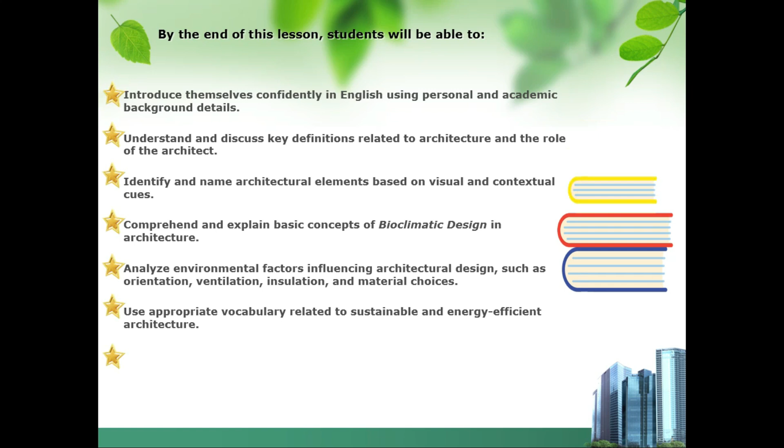By the end of the lesson, you will be able to introduce yourself confidently in English, understand the definitions of architecture and architect, identify architectural elements in images, learn the basics of bioclimatic design, and use essential English vocabulary related to sustainable architecture.

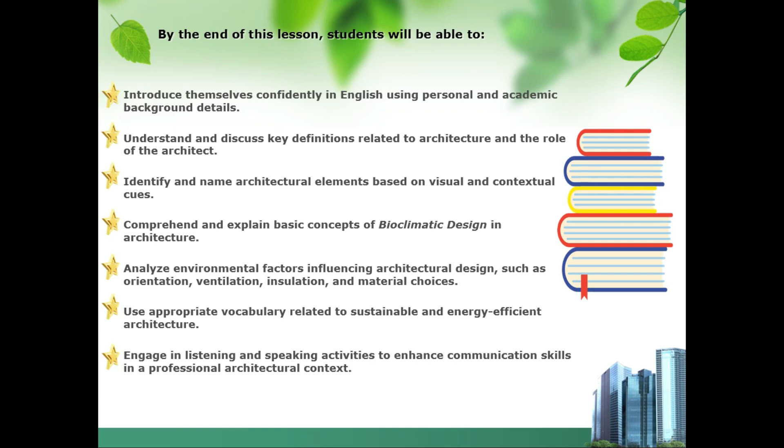Let's begin with a warm-up activity. Here's a short model you can use to introduce yourself. Now take 1 minute and prepare your own version. You can write it down and practice speaking.

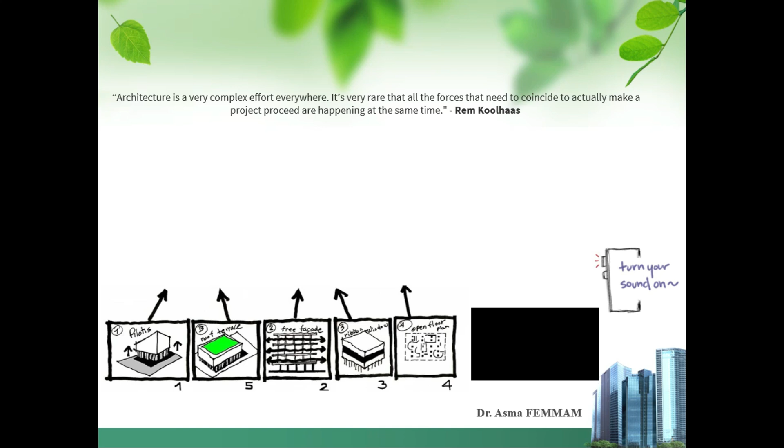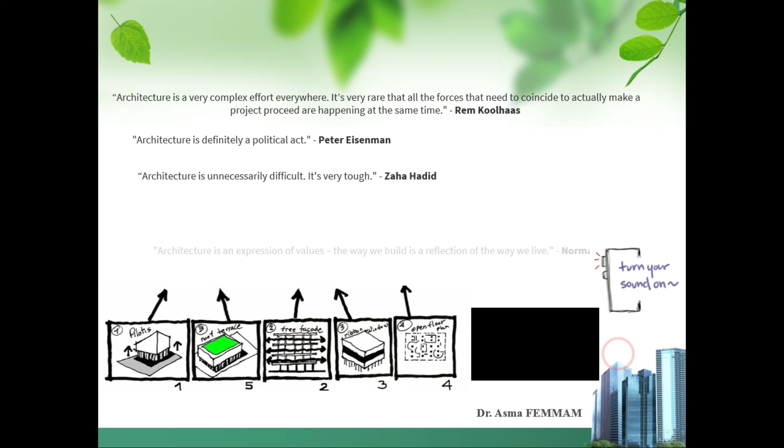Now let's think about what architecture really is. Here are some famous quotes from world-renowned architects. Rem Koolhaas: architecture is a very complex effort. Zaha Hadid: architecture is unnecessarily difficult. Norman Foster: architecture is an expression of values. Jean Nouvel: architecture is a mystery that must be preserved.

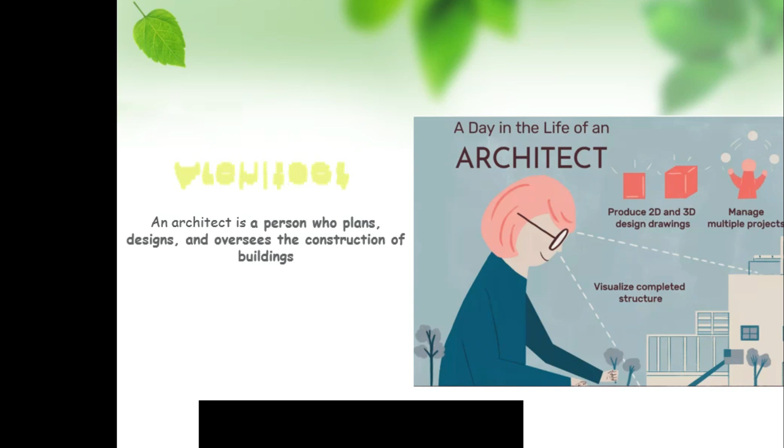These words show us that architecture is more than buildings. It reflects how we live and think. What is an architect? Let's define what an architect does. An architect is someone who plans, designs, and manages the construction of buildings. It's a profession that combines creativity, technical skills, and responsibility.

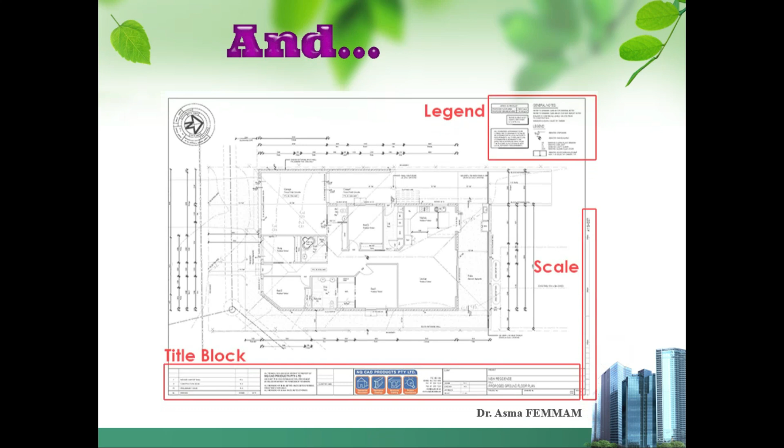Now I'll show you a short video. Please watch and listen carefully. Try to understand the main ideas and note down any new words. When the video is finished, you can pause the lesson and write a quick summary about your own house.

Let's now move on to the main theme of this lesson, bioclimatic architecture. This type of design focuses on reducing energy used by working with natural climate. What is bioclimatic design? Bioclimatic architecture uses natural resources like sun, wind, and light to heat, cool, and light the building. Before we go into the 6 principles, let's understand the philosophy behind bioclimatic architecture.

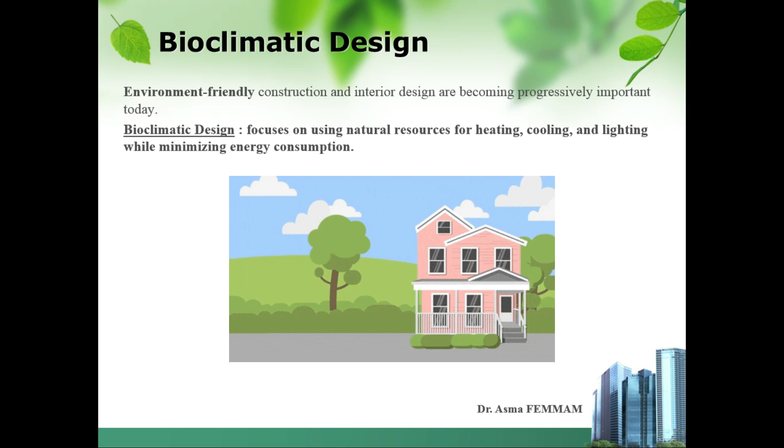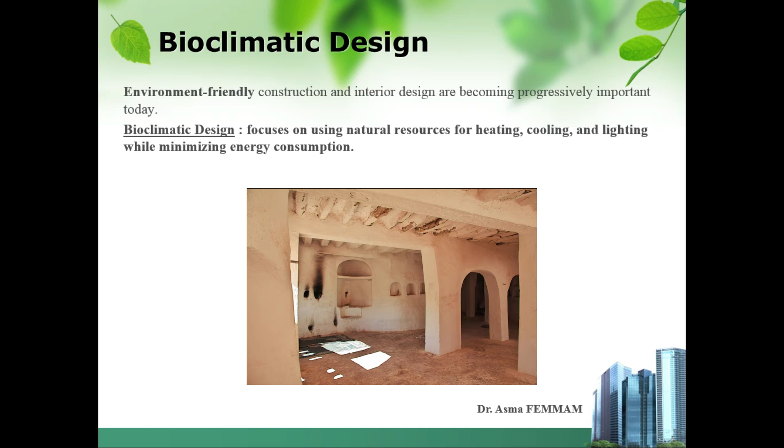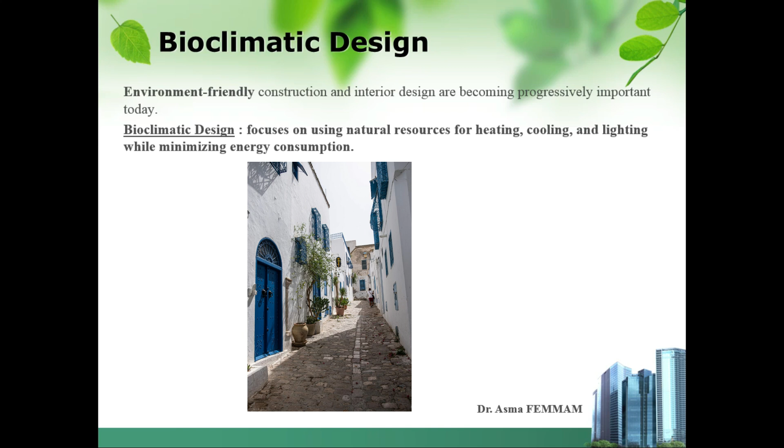Bioclimatic design is a method of designing buildings that take into account the local climate. This idea is not new. Traditional architecture in many cultures uses bioclimatic ideas naturally. For example, in the Algerian Sahara, thick adobe walls and small windows help keep homes cool. In Japan, wooden houses were built to allow natural airflow through sliding doors and open corridors. In Mediterranean regions, homes are often white to reflect sunlight and stay cool in summer.

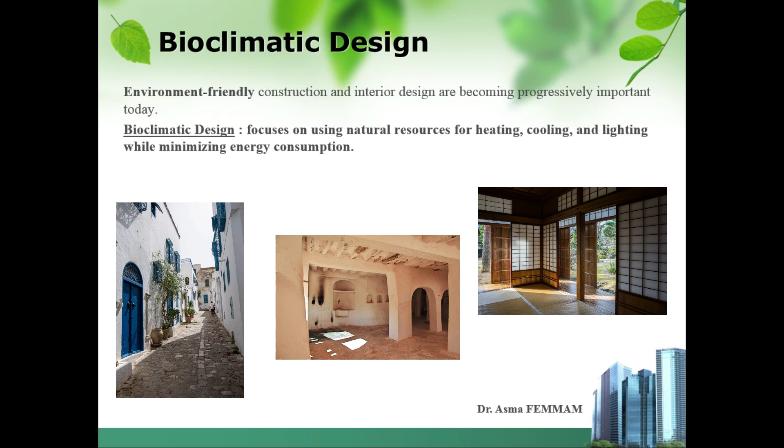Today, with climate change and the energy crisis, these ideas have become more important than ever. Bioclimatic design is not just about saving energy, it's about creating spaces that are healthy and comfortable. Let's look at the 6 key principles together.

Step 1 is to analyze the local climate. You must know the temperature, humidity, wind patterns, and seasons of the location. This helps you design in harmony with nature. Try to gather climate data before starting your design. You can use maps, weather apps, or local observations.

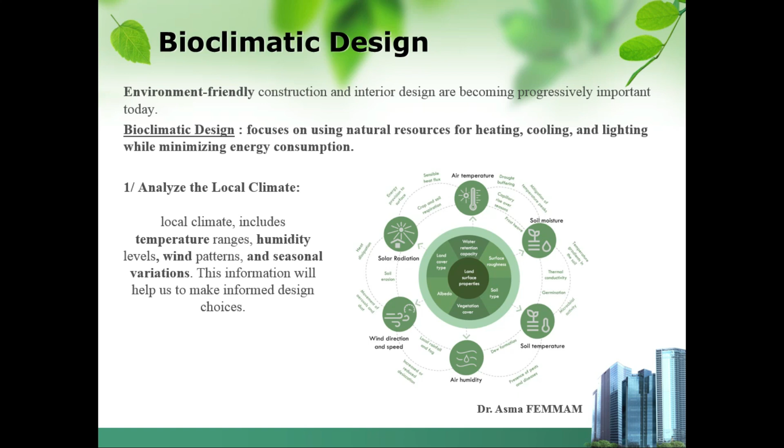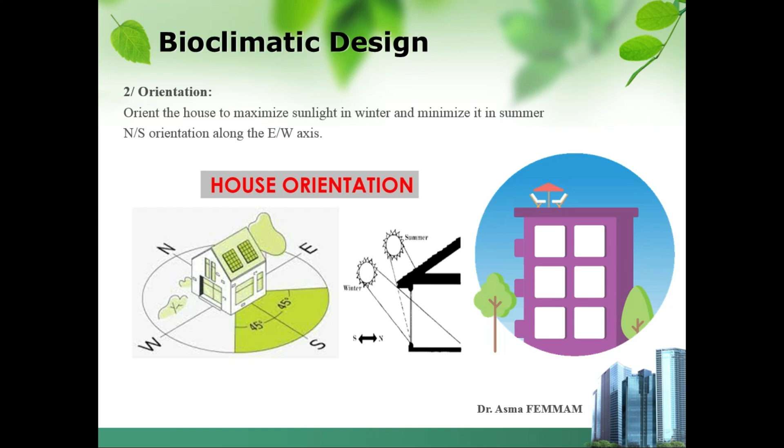Step 2 is orientation. Buildings should be placed to receive sunlight in winter and avoid overheating in summer. Usually, a north-south orientation along the east-west axis works best. Proper orientation can reduce heating costs by up to 30%. In Algeria, placing windows to the south allows good light and warmth in winter.

Step 3 is ventilation. Use windows and vents to allow cross ventilation, which helps cool the building without air conditioning. Cross ventilation can remove hot air and bring in fresh air without using electricity. This is common in traditional courtyard houses found in North Africa and the Middle East.

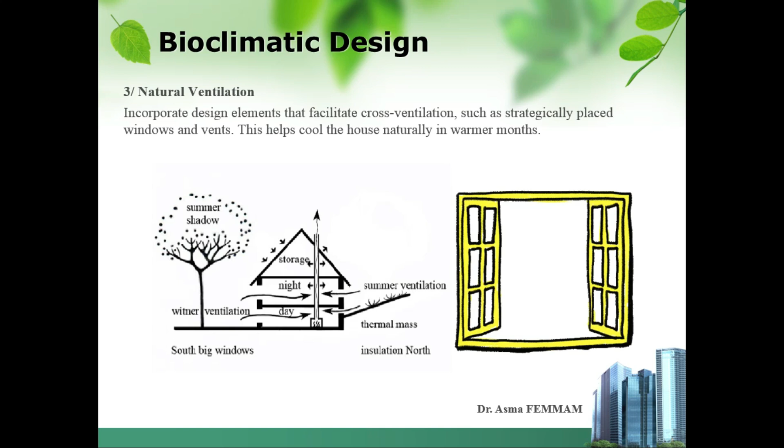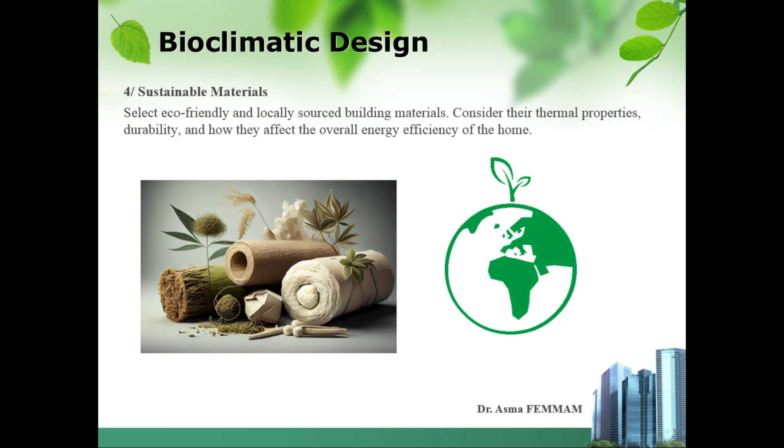Step 4 is about using sustainable materials. Choose local, eco-friendly materials that are energy efficient and durable. Using local materials reduces transport emissions and supports the economy. Natural materials like stone, wood, earth, and straw are breathable and low impact.

Step 5: use insulation and thermal mass. Insulation keeps the building warm in winter and cool in summer. Materials like brick or concrete can store heat during the day and release it at night. Thermal mass is like a battery for heat. It absorbs warmth from the sun and slowly releases it at night, keeping indoor temperatures stable.

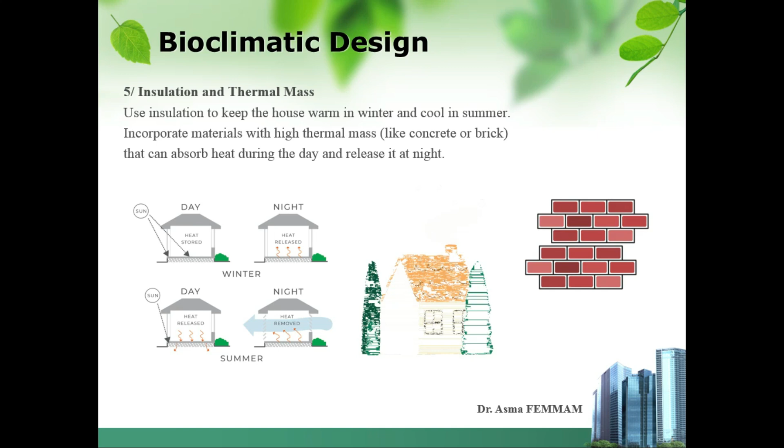Renewable energy. Solar panels, wind turbines, and hydroelectricity can power buildings while protecting the planet. Even small solar panels can help power lighting or hot water. Wind turbines are more suitable in rural or open coastal areas.

So, as you can see, bioclimatic architecture is both a scientific and ethical approach. It respects the environment, uses smart design, and creates better living spaces.